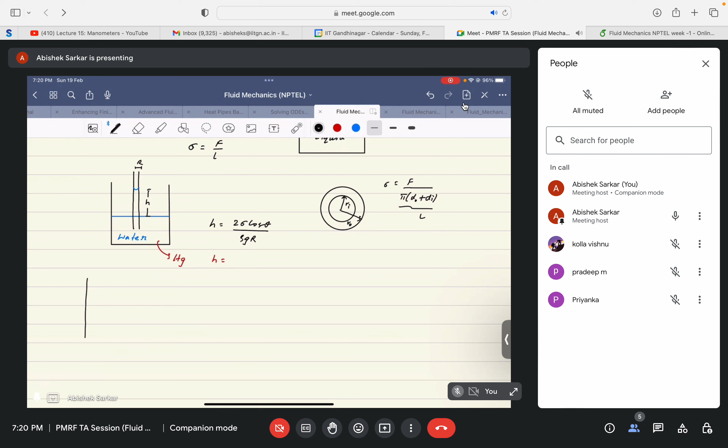The angle of contact will vary. Yeah, thank you, angle of contact will vary. So instead, let me zoom out this picture. In the case of water, the meniscus formed is of some shape like this. So the angle of contact in this case, if we extend it, becomes this, theta. This is for water.

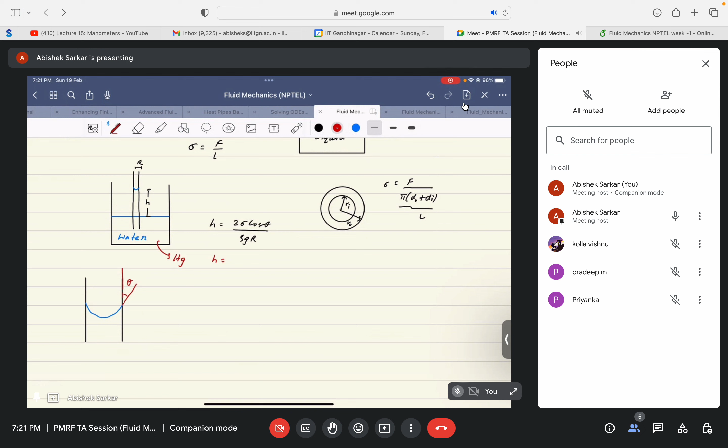But in the case of mercury, the meniscus is oppositely shaped - it is concave for water, so it will have a convex shaped meniscus. Since mercury is hydrophobic, it tends to have a different shaped meniscus, just opposite to what water has. So it will have a meniscus of this shape, and the angle of contact in this case becomes this, I suppose.

So because of the choice of our angle, is there anything, Vishnu, you want to add? 130. Yeah, 134, is it? Thank you, absolutely correct. So 135, which is not the exact value, but yeah, you're absolutely correct.

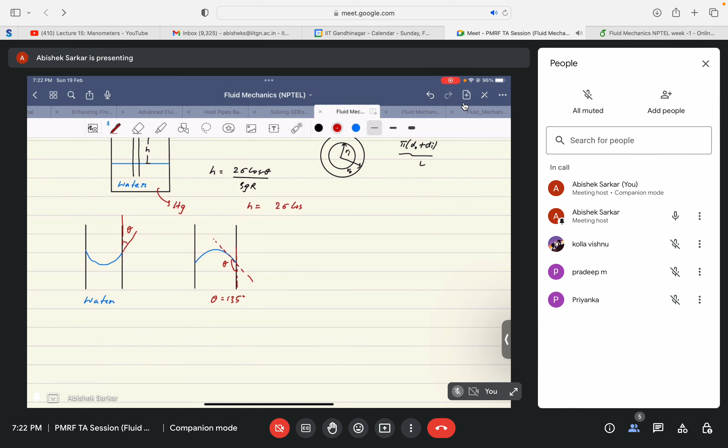But in general, if the angle is not explicitly mentioned in the problem, the expression for capillary rise in the case of hydrophobic liquids is given by 2 sigma cos(180 minus theta) divided by rho times g times R, where for mercury it's rho Hg minus rho water into g, and R is the radius of the tube. Okay, so I guess these concepts are clear.

If you just recall from your lectures, could anyone tell me what are the parameters upon which this capillary rise depends?

Based on atmospheric pressure and the density of the liquid. Okay, one by one. Pressure, then density of the liquid. Okay, yeah, then there are many. Geometry of capillary tube. Yeah, absolutely. Geometry basically means the radius. Material, okay, yes.

So what is the parameter that the material of the tube decides, specifically? Contact angle. Okay, I guess the contact angle is because of the liquid used, not the material, but something else. Material basically signifies the surface roughness.

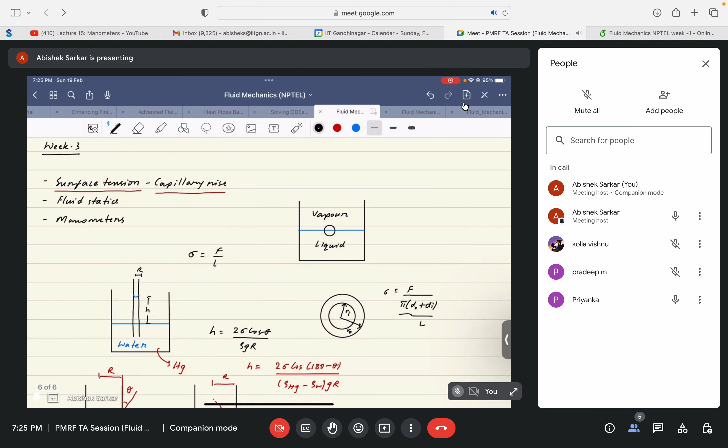So now we go to- Hello? Yes, yes, please. Sir, regarding surface roughness. Is it friction, like are you talking about friction? Yeah, absolutely, yes. Okay sir. Because the surface, however smooth the surface we may create, it will always have some small protrusions emerging out of its surface.

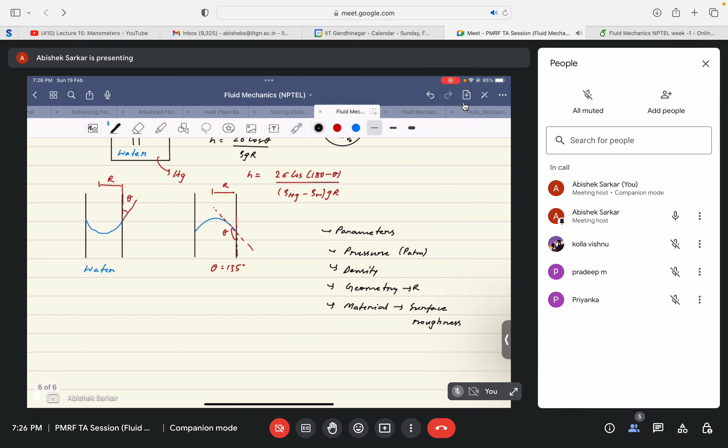No matter what we do, we cannot achieve 100% smoothness in the surface of the glass. So because of the manufacturing, I could say, difference in the type of different types of glass or any material that we've used, it will have different friction factor depending on the size of protrusions coming out of the surface. So then it may also have effect on the capillary rise, but we have not taken into consideration in this expression. But in general, it also depends on that. So just for your knowledge, I mentioned it here, and I guess Professor Chakraborty also mentioned it in the class, just for recapitulation. Okay sir, okay, thank you.

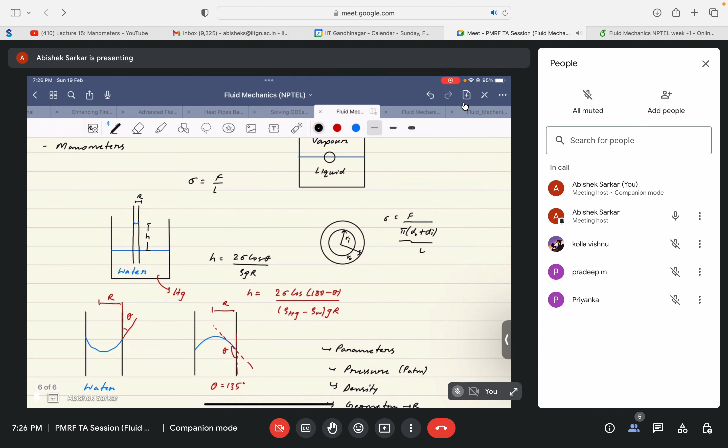I guess that's all from surface tension and capillary rise. So let me just recapitulate a bit from fluid statics.

So what do you mean by fluid statics? Why do we study it? How is it important from a fluid mechanics perspective? Could anyone please explain fluid statics? What does the name itself suggest? Vishnu, Pradeep, Priyanka, anyone please. There is no external force.

Okay, one by one please. Yes Pradeep, go on. Fluid will be at rest. Yeah, absolutely correct. The fluid will be at rest. Thank you. So Priyanka, I guess Pradeep also answered it correctly that fluid is at rest. So what...

Changes, or what makes this kind of problem different from, say, the fluid in motion? So what happens when the fluid is at rest? If you have attended the previous sessions, one of the three TAs might have discussed what happens when the fluid is at rest. Professor Chakraborty has also discussed it in his lecture.

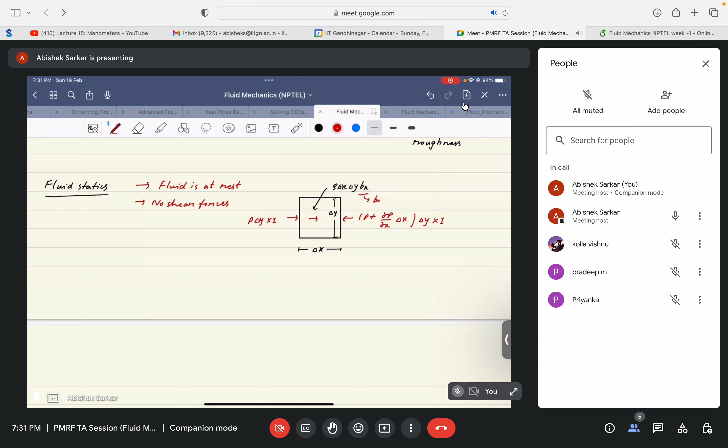I'm just doing this for the forces along the x direction. You can approximate the same for the y and z directions - that will be completely correct, but for simplicity I am just doing along the x direction. Here bx is the body force along x direction. Following the steps discussed in class, you find out all forces acting along the x direction, and you get the final expression as minus dp by dx plus rho bx is equal to rho ax.

Don't mind that I'm still keeping the rho ax, assuming the fluid is in motion and disregarding the presence of shear forces, but keeping in mind the condition of fluid statics, this term will go to zero, and you're only remaining with del p by del x is equal to rho bx.

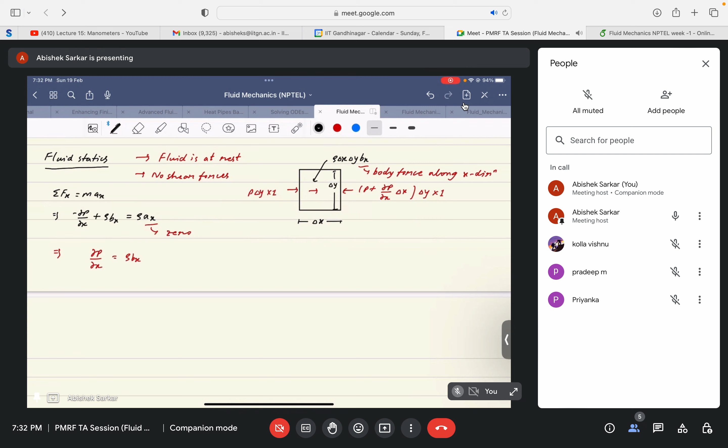Okay, for fluid statics, but I wanted to focus upon this expression - say equation 1, then this is 2, because this equation has a special name that you will eventually encounter when you go deep within this course. So this is a very special name. So anybody by chance knows what this equation is called?

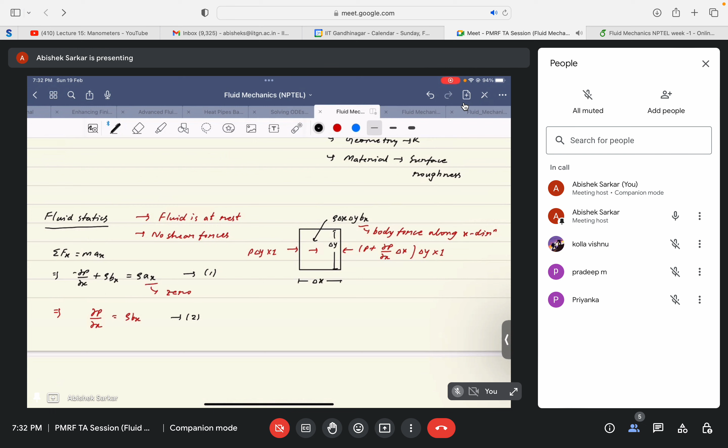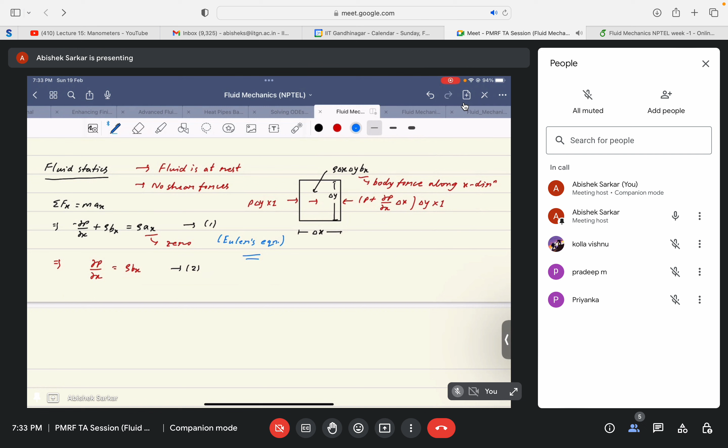Euler's equation. Yeah, thank you Priyanka, you're absolutely correct. This is known as the Euler's equation. It is same as the Navier-Stokes equation, but just removing the shear force terms. So Navier-Stokes equation without considering the viscosity of the fluid gives the Euler's equation. You don't need to emphasize upon it much for now, because you will eventually read it in the fluid dynamics part, but for your understanding of the course in a better way, I'm just trying to give you the essence of what you're going to eventually learn.

So this is known as the Euler's equation. So we are left with equation 2, which basically gives us pressure gradient along x direction is equal to the density of fluid into the body force along the x direction. Similarly if we consider other directions, we will obtain del p by del y is equal to rho b y, and del p by del z is equal to rho bz. So this is all for Cartesian coordinate system.

I will just again go a bit fast because these things have already been discussed in the class, but still, because these things are necessary for solving the problems that we'll do in today's class, you need to have some basic recapitulation.

I guess Professor Chakraborty has mentioned what this symbol means. So can you please tell what this symbol basically means? Free surface. Yeah, thank you, absolutely correct. This is known as a free surface.

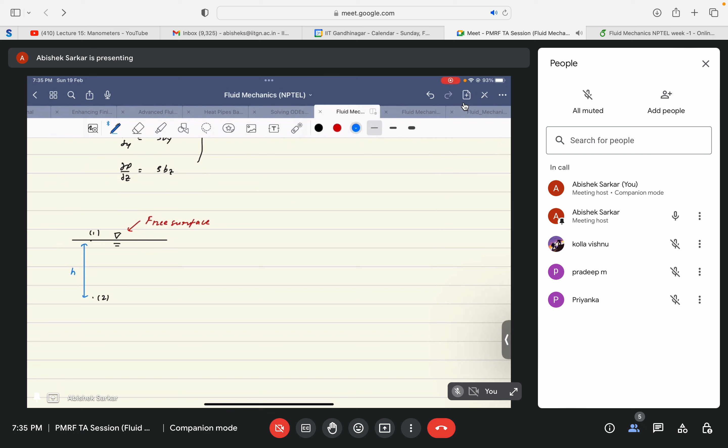So say we consider a case where we want to find the pressure at a point - say this is point 1 and this is point 2, and we want to find the pressure at point 2, where it is at a depth h from the free surface. Say I want to mold my coordinates such that this is along x, this is y, and outside of the screen, perpendicular to it, is the z direction. So the fluid is completely at rest. Say I'm considering a stationary container, the fluid is kept there, and I want to find the pressure at point 2.

So what will be the body force along x direction? Can you please tell, given this is the coordinate system, and this is the scenario, fluid at rest. So what will be the body force along the x direction? Considering only gravitational force, it will be zero along x and z.

Thank you, you're absolutely correct. So as I already mentioned, it is a stationary container and the fluid is at rest, so the only body force that will act in this case is the gravitational force.

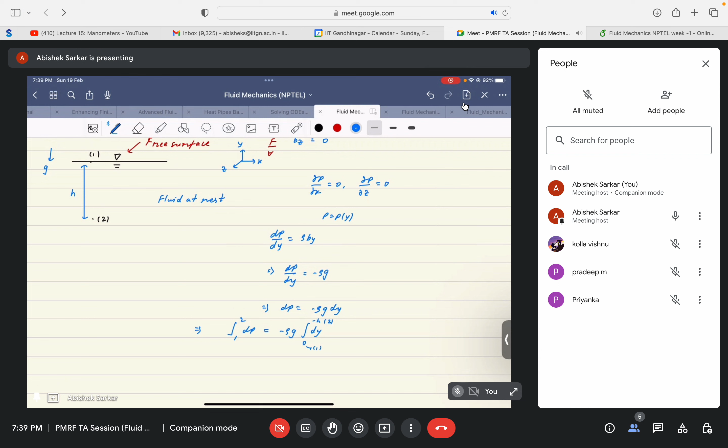Why have I chosen minus h instead of plus h? Because we are going below the surface, vertically downwards, right? And we have assigned our coordinates in this fashion: vertically upwards is the positive y direction. So given this sign convention,

we will obtain P2 minus P1 is equal to rho g h. Then pressure at point 2 will be given by P1 plus rho g h. And if we consider that pressure at point 1 is equal to the atmospheric pressure,

then pressure at point 2 would basically be equal to P atm plus rho g h. So this is a very important expression just to find the pressure at a point, given that the fluid is at rest. So I guess this is also clear.

So only thing that remains is the principle of manometry for today's class. The principle of manometry, or the basic principle upon which manometers function, is basically upon this fluid statics, the hydrostatic law. So it is just the application of this expression, choosing the proper point of reference.

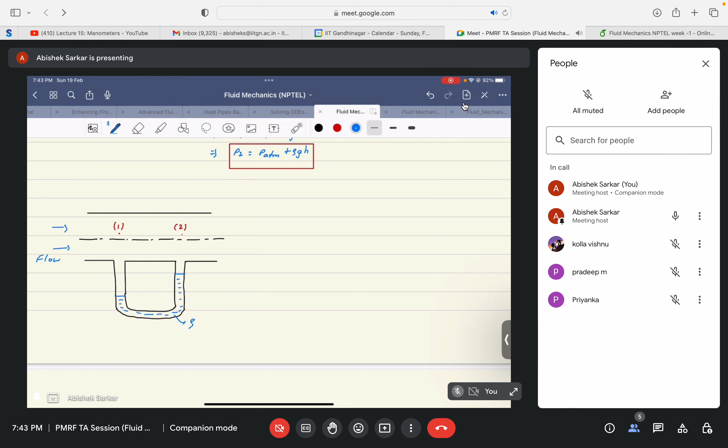Can you please explain? Could you please repeat the question, sir? Now I mentioned that there is a flow through this pipe, and only then do we have a pressure difference between points 1 and 2. Why is it not possible that without flow there should also be a pressure difference between point 1 and 2? Why does there have to be a flow for there to be a pressure difference? So would you please tell, given there was no flow, would there be a pressure difference between point 1 and 2? No, it will be in equilibrium.

If there's no flow, that will be equilibrium. Yeah, thank you. So both of you are absolutely correct.

So if there's no flow, there's no pressure difference between point 1 and 2 because they are at the same level. I will clarify it because it may create confusion, but yes, they are at the same height. So if there is no flow, there is no pressure difference between point 1 and 2. But given that there is a flow in this case, there will be pressure difference because of the loss in the pressure head due to friction in the pipe. You will eventually learn in the later part of the course what is pressure head, what is pressure drop in a pipe, how it is measured.

There are various expressions using it. Then you will eventually learn the Bernoulli's equation, how it is derived. So in that case, you will know how pressure difference arises due to the flow between 2 points in a pipe at the same height. So it is the flow that creates the pressure difference along 2 points at the same height.

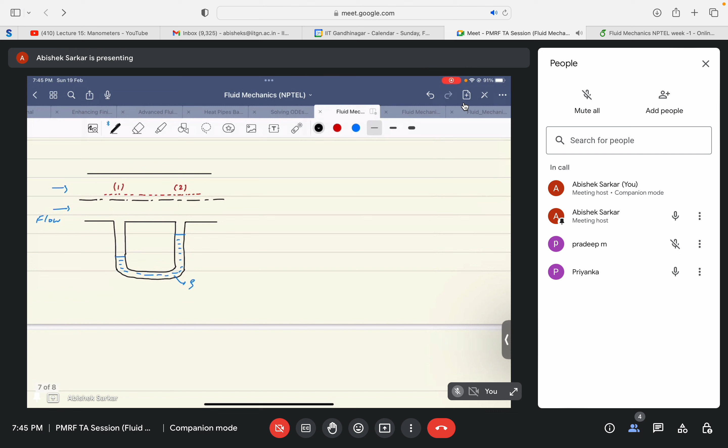Okay, so yeah. Hello? Yes sir? Regarding the flow which you mentioned, for the flow to happen between 2 points, the point of consideration is the energy difference, no sir, as per Bernoulli's equation?

Yeah, you are absolutely correct. Yes, so say there can be pressure difference, but energy can be same. Can't it be like that? I mean, since energy is same, there can't be flow, but pressure difference will be there. Can it happen like that?

Okay, you are saying the energy is same, but there is pressure difference. Yes, can it happen like that? So there is no flow because energy is same. Let me think about it. Okay, I will just try to write the equation and let's discuss together.

Yes sir, yes. But the very principle upon which the Bernoulli's equation is derived is the conservation of energy. So energy is conserved between these 2 points. It is by that principle only we have derived the Bernoulli's equation. So what you have mentioned is that there is no pressure drop between the 2 points.

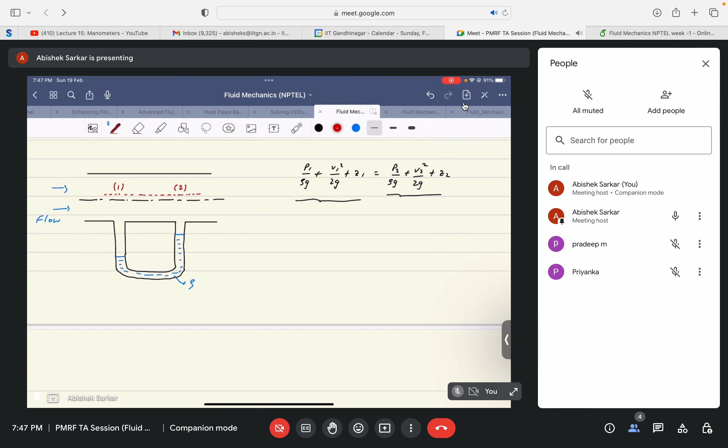Okay, so let me assume that there is no pressure drop between these 2 points, right? So the kinetic energy at both the points are equal. Okay, so yeah, this is your case, right? This is what you're mentioning, right?

No sir, I mentioned that pressure difference is there. Can it be possible, such a scenario? Energy is same, pressure difference is there. Yeah, energy has to be same between the 2 points, right? There is no difference. The energy has to be conserved, right? It is the basis by which we have derived the Bernoulli's equation, right?

No sir, but for flow to happen, there should be a difference in energy, right? No, that's not the case. Have you seen it mentioned like that in the lectures, or are you asking out of curiosity? In general, actually, we need...

Hello, yes Pradeep. We need pressure difference for flow to happen, right? It's not about energy, right? Yes, that only I'm speaking. The fluid should... yeah, okay, yeah, that only. So that only I'm trying to explain it to Priyanka.

See, we derive... listen carefully. We derive Bernoulli's equation with the principle that the energy between the 2 points are equal. That's why there's an equal sign, right? We have equated the energy between 2 points, and this is basically the flow energy. Say En, this is the kinetic energy, this is the potential energy. So equating these energies at 2 different points, to actuate the flow these parameters balance each other in a different way.

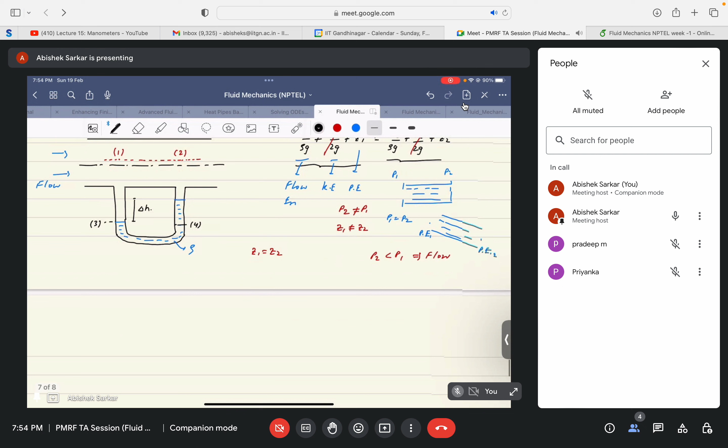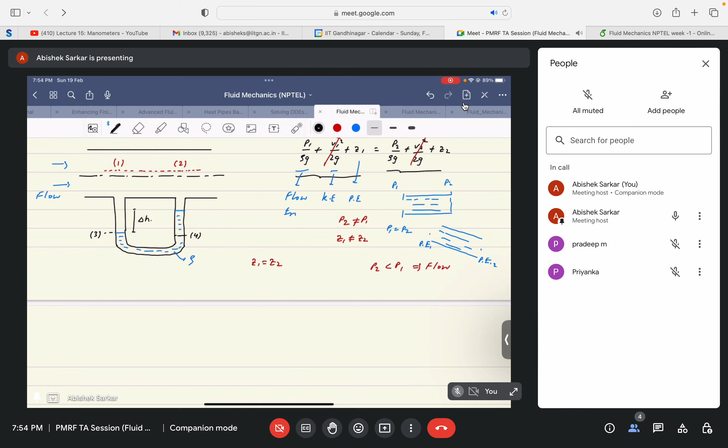To obtain the pressure difference between two points, what we basically do is balance the pressure with respect to a particular datum. A datum is just a point of reference. In this case, we choose our datum to be of this form, say the datum passes through point 3 and 4. It is upon this only we will measure our pressures, we will equate our pressures.

So basically this means that pressure at point 3, because the fluid flow is stationary at this region, pressure at point 3 would be equal to pressure at point 4. So am I correct? I guess yes, sir, it is correct.

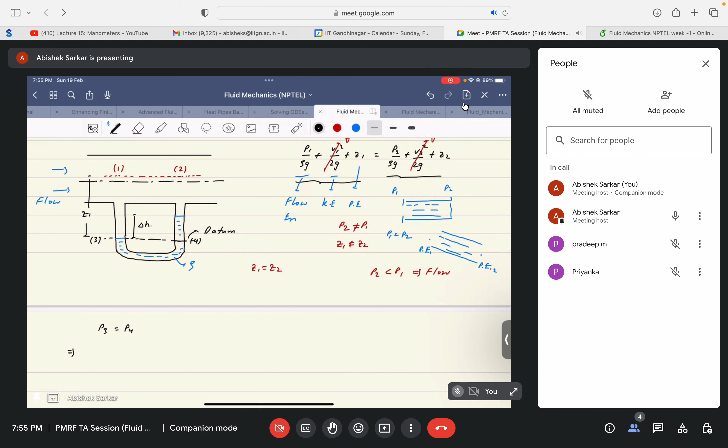Thank you. So this would be, say it is Z1, the level of the liquid from point 1, and from point 2 to the surface of the liquid is, say, Z2. So we just do the pressure balance. So here it is point 1, so P1 plus, so say this is some fluid, say this is water, for ease of convenience. So what will be the pressure due to the water at point 3?

Because of this height of water, what will be the pressure at point 3? It will be rho water G into Z1. Again for point 2 this is a bit tricky. Up to Z2 the height would be equal to rho water G Z2, but here, say this is point 5, so point 5 to point 4 the liquid changes. So we need to take into consideration the difference in liquid along the height, it is not the same. Throughout Z1 the liquid was the same, it was water. That's why we have directly written it as rho W G Z1.

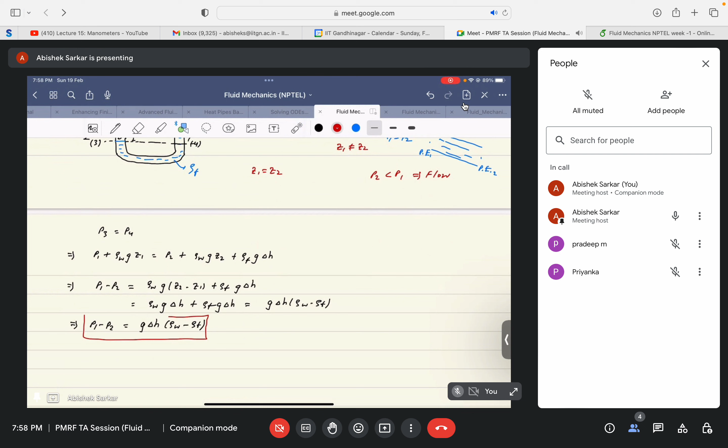So, okay, so this is all about the principle of manometry.

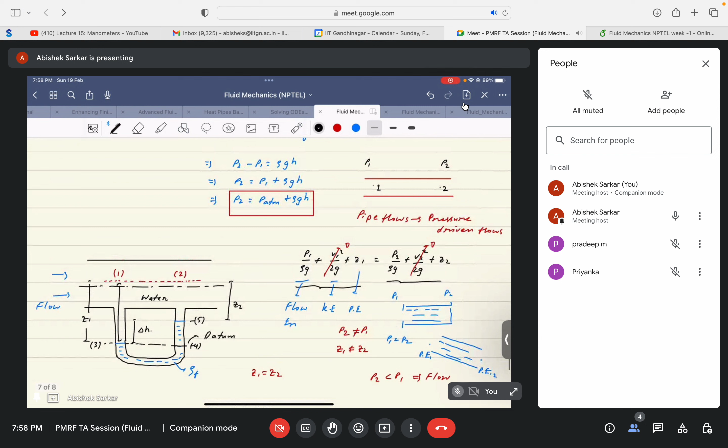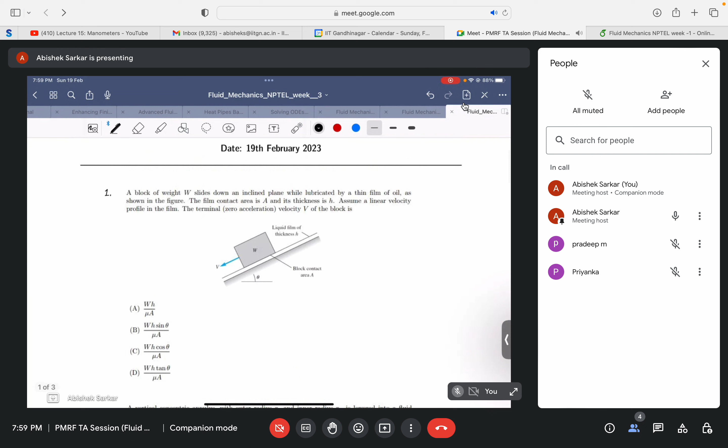So I guess I have covered, recapitulated all the topics discussed for week 3, so I'll directly go to the problems for this week. Both of you are there, so please help me out solving these problems. I guess you are very clear and better than me in solving this, so please help me out.

So I'll read the first question. A block of weight W slides down an inclined plane while lubricated by a thin film of oil as shown in the figure. Yeah, this is the oil. The film contact area is A, and its thickness is h. So this is basically equal to h.

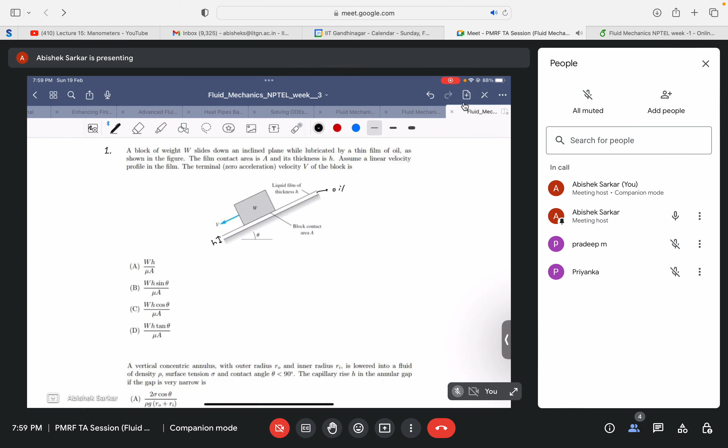Assume a linear velocity profile in the film. The terminal or zero acceleration velocity V of the block is given by, so these are the options. Please go ahead and try, and once you get the answer, don't just tell me the option, also tell me how you approached solving it, and we will try to solve it together. Just look at the options and tell me, solve it and tell me what would be the right answer.

Hello sir. Yeah, so using balance of forces. Option B. Okay, this is one answer. So Pradeep, you feel the same way? Yes.

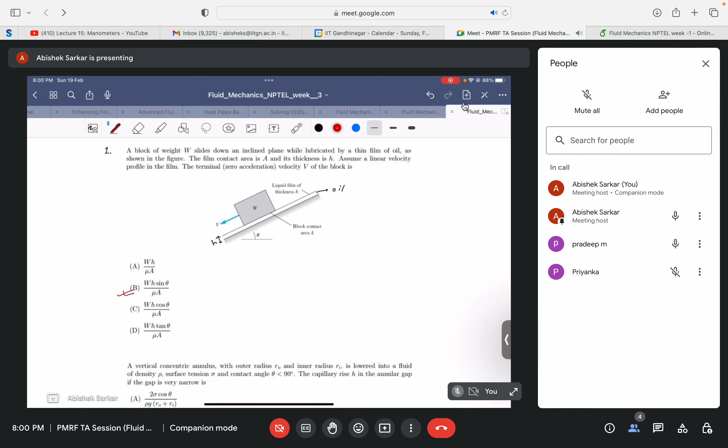Okay, then I think I would not have to solve this entirely, but just to tell the steps for reference. If I'm wrong in any way, just tell me. So weight will act vertically downwards, so we have different components of weight. We dissociate the weight into different components. Say, so this would be W cos theta. This would be W sin theta, right?

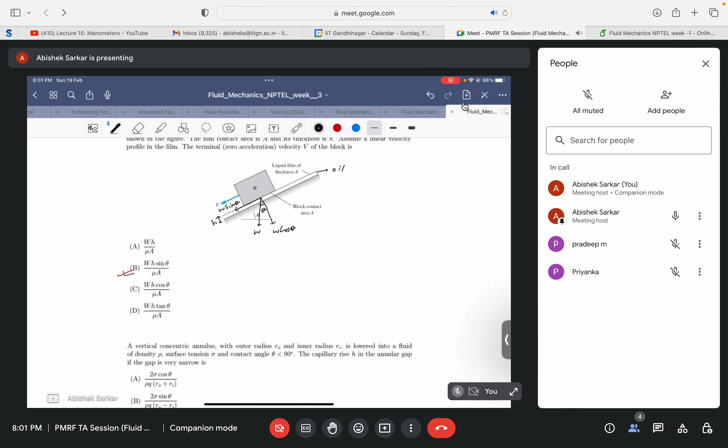So the motion of this weight will be resisted by the shear force, right, that acts against the direction of motion of this block. So that will be given by tau into A, right? I guess the area is also mentioned A. So it basically will be equal to W sin theta is equal to tau into A.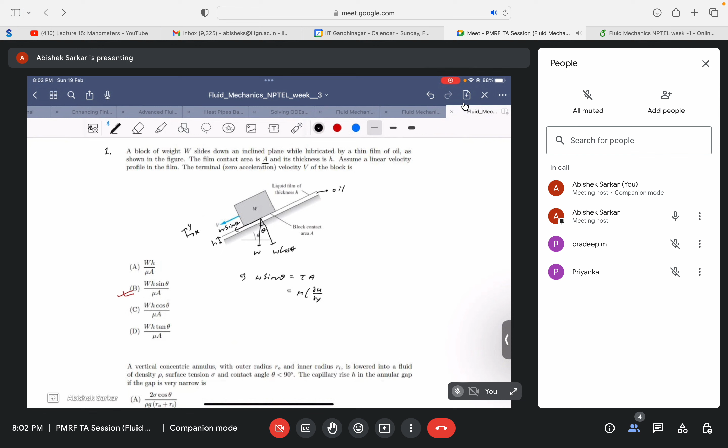And tau is given by mu del u by del y, given we have chosen our coordinate system like this. You have to mention the coordinate system. If you don't mention it, that's fine, but it's good practice to mention your coordinate system once you try to solve the problem. It shows how clear you are regarding your concepts, so it's very good practice.

So what is del u by del y? V by h. Yeah, they've asked us to choose a linear velocity profile, and if you attended the previous week's session, I explicitly told that even if they have not mentioned a linear velocity profile, if the question says the film thickness is very small, we can assume a linear velocity profile. But here they have explicitly mentioned it, so it's very simple for us.

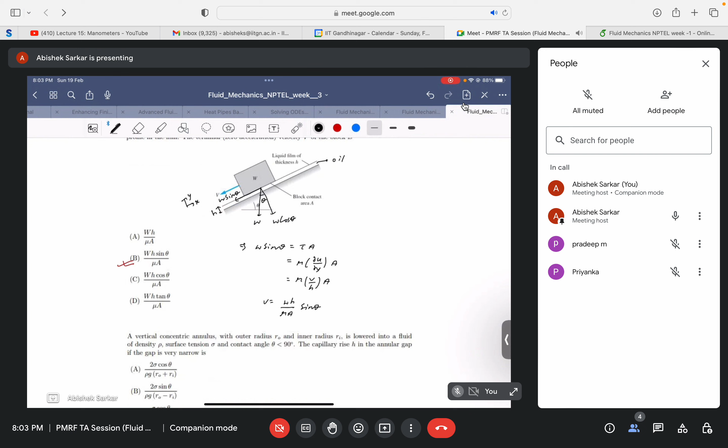So it's mu v by h a. Okay, just play with the terms, so we obtain the velocity as... sine theta. So I guess you're right. Let's go into the next question. Thank you for helping me solve the problem.

Let's go to question number 2. A vertical concentric annulus. Do both of you know what annulus means? Two concentric cylinder tube. Yeah, thank you, you're absolutely right. So annulus is basically the gap between the two cylinders. So concentric annulus with outer radius RO and inner radius RI is lowered into a fluid of density rho, surface tension sigma, and contact angle theta, which is less than 90 degrees.

So the capillary rise in the annular gap, if the gap is very narrow, is given by, so these are the options. It's very simple, again you apply the principle of capillary rise. Just go to the fundamentals of how the expression of capillary rise was obtained, play with the terms a bit and you will easily get the expression. So please both of you try a bit. I have told you how to approach it. Just tell me what is the answer, and I'll wait for a few moments. Please try it and tell me the answer.

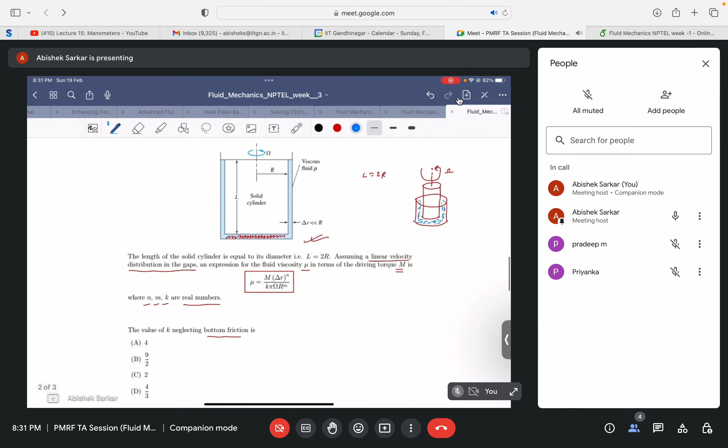So yeah, I guess you understood the problem. Is that clear, or do I need to repeat it again? Is that clear, Pradeep and Priyanka? Yes, sir. Yeah, thank you.

So it's a very involving problem, I must say. It's a very interesting and involving problem, and there are many sub questions to this problem. You need to derive the expression itself from the start. If you refer to the notes, follow the similar steps, find an expression for M, for mu with respect to the applied torque and other flow and geometric parameters, and then we will find out what are the values of these indices and the constant K. So just find an expression by deriving the governing equations as done by Professor Chakraborty.

Go to your notes and tell me what would be the value of K for the first question, neglecting the friction at the bottom surface. Please try, and once you obtain the solution you need to help me out to solve the problem also, because I don't know how to approach it. So please go ahead, take your time, it's an involving question.

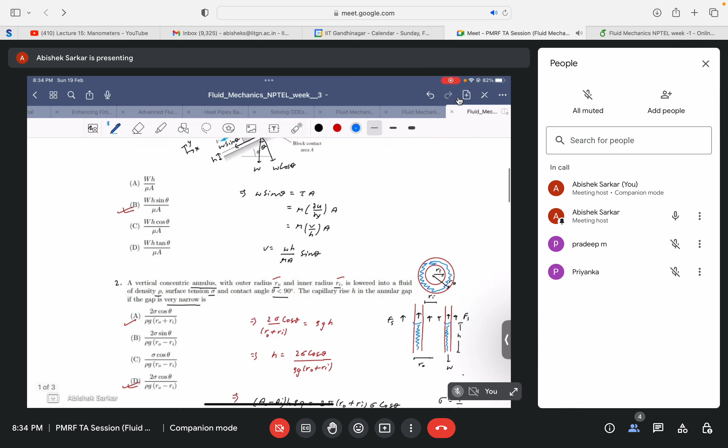Okay, sorry to interrupt both of you. I just want to clarify one more concept before going forward. So Priyanka, could you please pay attention for a while, both of you actually? Yes, sir. Yeah.

So previously you have asked a question regarding your energy head, right? Yes, sir. Yeah. So I just went through my own notes and tried to recapitulate. So you were right, okay. I was also right in some sense that this Bernoulli equation has been, what to say, derived keeping in mind the energy conservation.

But this expression is incomplete in a practical sense, in a way that there is always a head loss in the flow when flow flows from point 1 to point 2. Head loss occurs because of friction within the pipe, right? No pipe is smooth enough to have zero friction, and that basically occurs because of the viscosity of the fluid, right? If you recall.

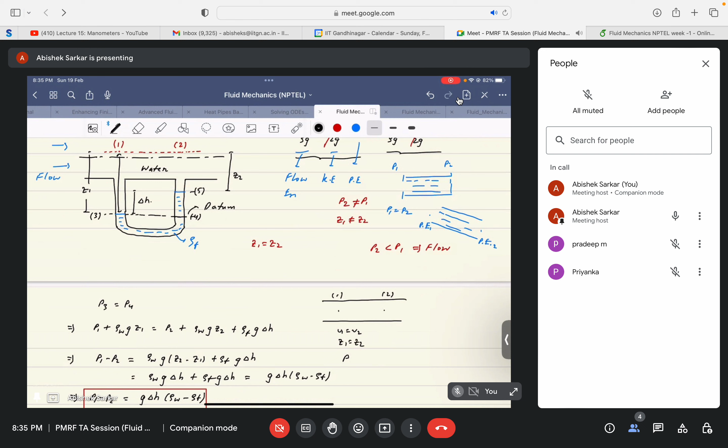Yes, sir. Yeah, so there has to be a head loss because of the viscous nature of the fluid, right? So given that, even in a scenario, say in a straight horizontally placed pipe, between point 1 and point 2, v1 will be equal to v2. Why? Because the dimensions are same, right? Again, yes, z1 equal to z2, and you are saying that there is a flow because of pressure difference, say p1 is greater than p2. But to satisfy this equation, there has to be a term on the right hand side to balance this pressure difference, right? The difference in the pressure head. So that is being balanced by this loss term, okay, the head loss term in the equation.

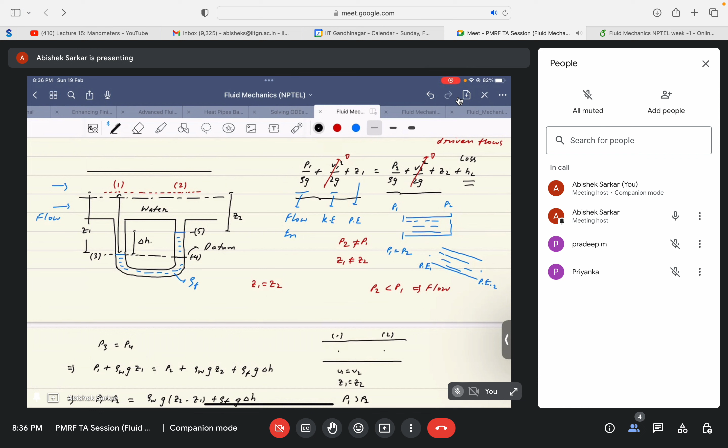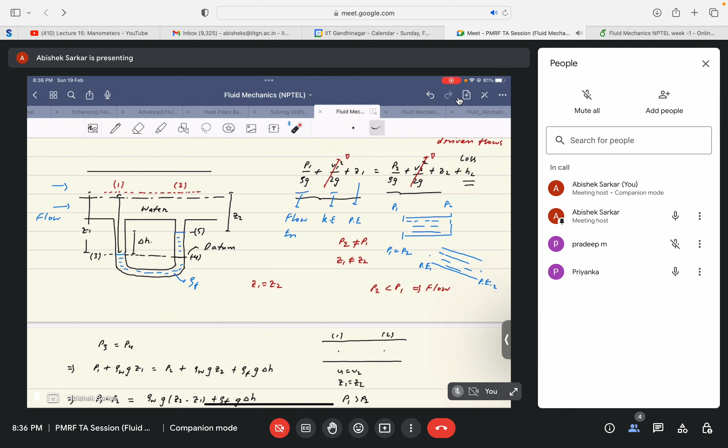So is it clear now? The energy is conserved, but the difference in the pressures is being balanced by a head loss term, this term. Okay, sir, okay, I guess it's clear now. So yeah, please proceed with the given problem. Thank you again for asking such doubts. It's very important for me and as well as the students, more importantly me, to make my concepts clearer.

So thank you, and please go ahead with this problem.

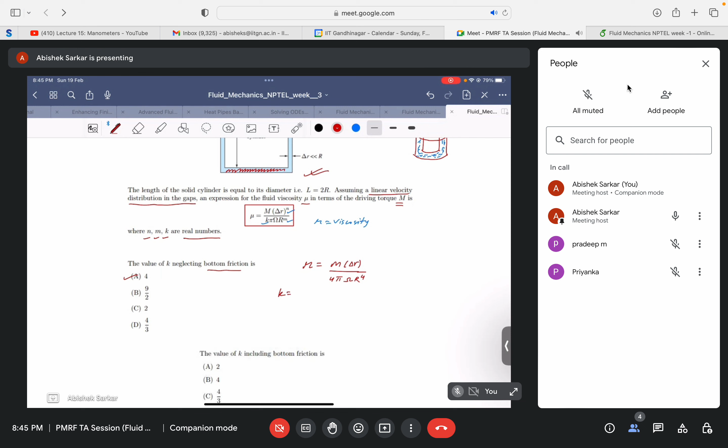So let's wait. Pradeep, have you obtained the same expression? I guess he's also doing it now, so that's fine, still doing it. Yeah, you're correct. So comparing these expressions, we find the value of k to be equal to 4. Okay, very nice, thank you.

So question number 5, I guess, where we need to find the value of k including the bottom friction. Now we cannot neglect the bottom friction, we need to include it. Keeping that in mind, have you done it, or do you need more time? 9 by 2. Let me check. Okay, so could you please tell how you have done it? Just tell me the steps, I don't need the full expression, just the steps.

For the bottom case, I did integration, sir. You have integration in the sense, please elaborate a bit more, like what have you assumed? Let me draw it. That will be good, let me share what I was trying to do. Pradeep, you want to say something? No. Okay, that's fine, feel free to speak up if you have any doubt or are stuck somewhere.

This is the fluid. So now there is friction in the bottom part also. Say omega. So how did you evaluate the friction in the bottom part? I assumed a circular cross section, if viewed from the top. Let's draw it nicely. Then please tell me how you assumed and did the integration, which elemental surface you have taken. Please tell everybody, so that will be good.

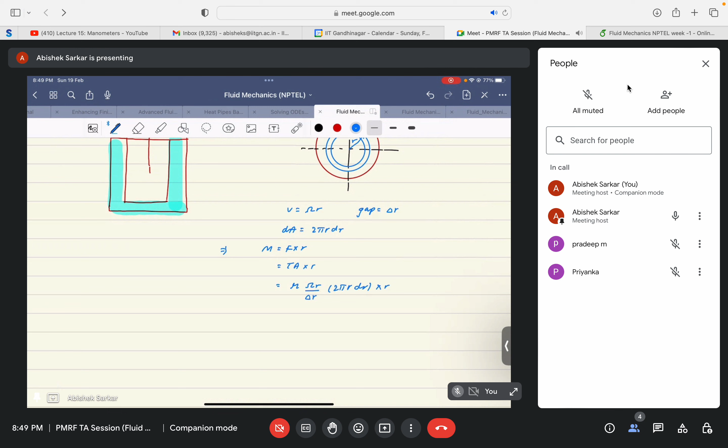Right, and then how will you calculate the moment? For the torque, torque is nothing but force into radius. Force is given by stress into area. And stress we get from the viscosity, mu into V by delta R, because it is a linear profile. And then again there is an area 2 pi r dr, and then again there is a radius, right? So I guess this is an elemental moment instead of the complete moment, and this is not the complete area but the elemental area, so you basically integrate these expressions.

So what are the constants? Mu, omega, delta r, 2 pi are constants. We integrate r cube dr, right?

Yeah, then I guess if we integrate it, we will obtain an expression. What is the final expression that you obtained? T is equal to, M is equal to pi mu omega r power 4, capital R power 4, by 2 delta R.

And since you're trying to find the complete torque, you need to take into consideration the friction at both the lateral surface area and the bottom surface. So what have you done? I added the two, sir. Okay, so net torque is equal to m1 plus m2. Say this is m2, and initially you obtained this m1. So you add both of them.

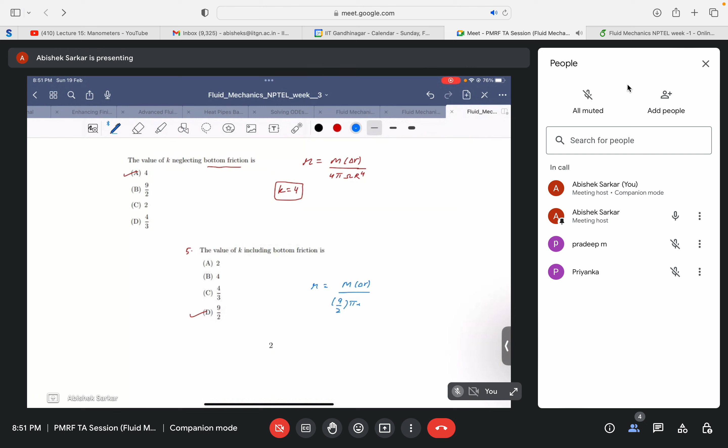So this is the net torque if we consider the bottom surface also. So if we isolate mu, we can write it as mu equal to m delta r, 9 by 2 pi omega r to the power 4. I guess I'm right.

So if we compare it to the expression, mu equal to m delta r to the power n, k pi omega r to the power m. So if you compare both expressions, then k is equal to 9 by 2. Pradeep, is that clear?

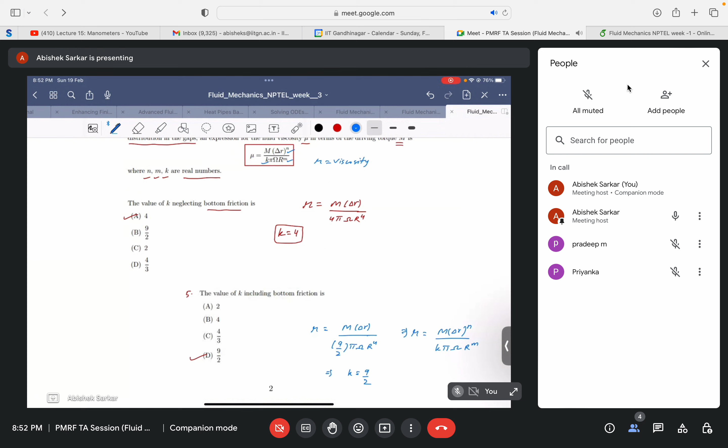Yes, sir. Okay, let's look into the next question. What is the value of n? It's very simple now, I guess. Compare the expressions. 1. Yeah, absolutely correct. And what is the value of m? M is 4. Thank you.

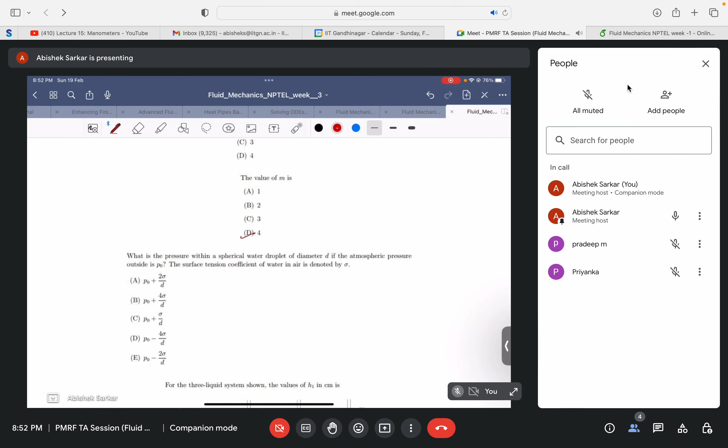So yeah, this was a very involving question. I guess you had to derive it from the start, and if you have followed Professor Chakraborty's lectures, you would easily derive it. But it's very important.

So yeah, the next question. It's a very trivial question, but let's see. What is the pressure within a spherical water droplet of diameter d if the atmospheric pressure outside is P0? The surface tension coefficient of water in air is denoted by sigma. It's a very trivial question, but still you have to think a little bit and recall the expression for the surface tension force for a spherical droplet. So what is the expression? Recall the expressions and just tell me the correct option.

Pradeep, Priyanka, yeah please. Sir, option B. B. Okay, B, the second one, yeah this one. So Pradeep, do you feel the same way? No, I'm checking that. Okay, sure, please take your time.

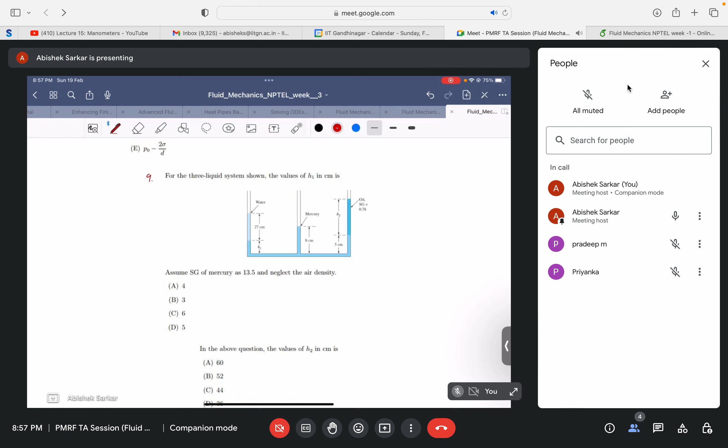Okay, so the final question for today's session. This is basically an application of the manometry principle. Let me zoom in a bit... Yeah, it's clear now. It's a very simple question, but you need to apply all the basic steps: choose the correct datum, and then find the respective heights. Please go ahead, every information is given in the diagram in the question itself.

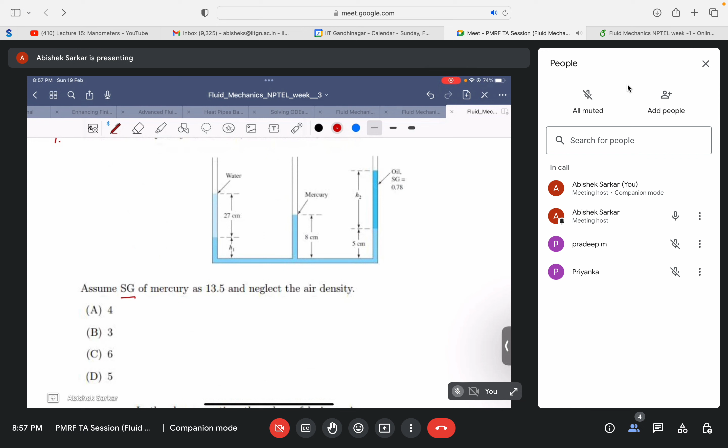The specific gravity of Mercury is 13.5. Neglect the air density, so everything is given. You need to find H1 and H2, subsequently H2 for the next part. It's very simple, just 2 or 3 lines of equations. Please go ahead.

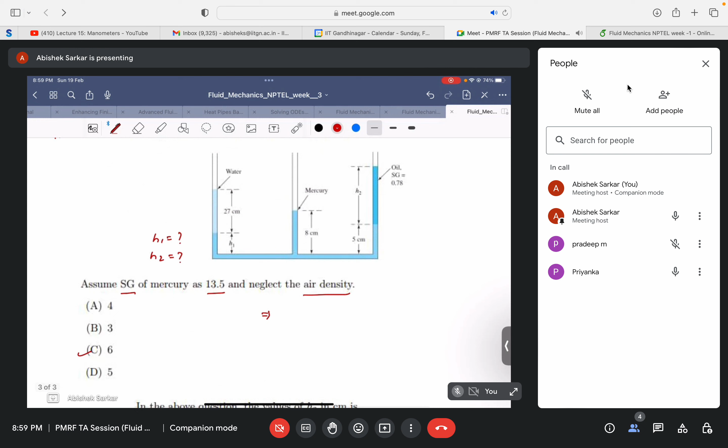Okay, let me also try to solve it accordingly, and you can help me out. I will just write the expressions, then you may tell me what you have chosen as the centimeter value, what you have done. H1 is 6 centimeter. Yes sir, okay, and H2? You can evaluate. Pradeep, did you also get 6?

Yeah, I couldn't get the answer. Have you also got 6, Pradeep? H1 equal to 6.

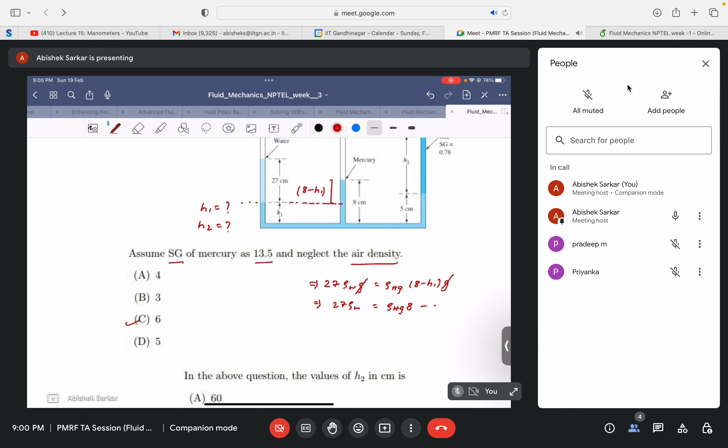So if we choose the datum to be here, then we get this height as 8 minus H1. Then we basically do the pressure balance above this datum line, so it will equal 27. This is the height. Rho water into G would be equal to rho Hg times 8 minus H1, into G -- let me not write G again, then you may get confused. So you cancel out the acceleration due to gravity, then 27 rho W would be equal to rho Hg into 8, minus rho Hg into H1.

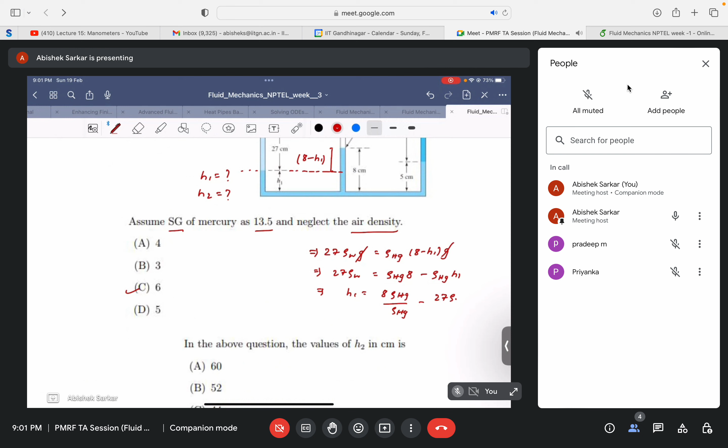Then we just divide, so H1 would be equal to... oh no, I'm sorry, just reverse it: H1 equals 8 rho Hg by rho Hg, minus 27 rho W by rho Hg. I just took this term to the LHS and that to the RHS. So then we get...

H1 is equal to... Priyanka can go ahead with the next question, H2. So this is basically 8 minus 27, and since rho Hg by rho water will be equal to 13.5, it becomes 8 minus 2, because 13.5 into 2 is 27. This is given by 6 centimeter.

So this is simple, you can apply the similar principle on the other side also. Choose the lower one as the datum. Priyanka, did you get the answer for the next part? 52 centimeter? Yeah, absolutely correct. Following the similar steps, you get the answer to be 52 centimeters.

I guess time's up for today. Pradeep, did you obtain the answers? Pradeep? Yeah, hello, please, did you obtain the similar answers? First one I got it. As for the second one, you take it for both densities, right? Just compare with mercury and the oil, okay.

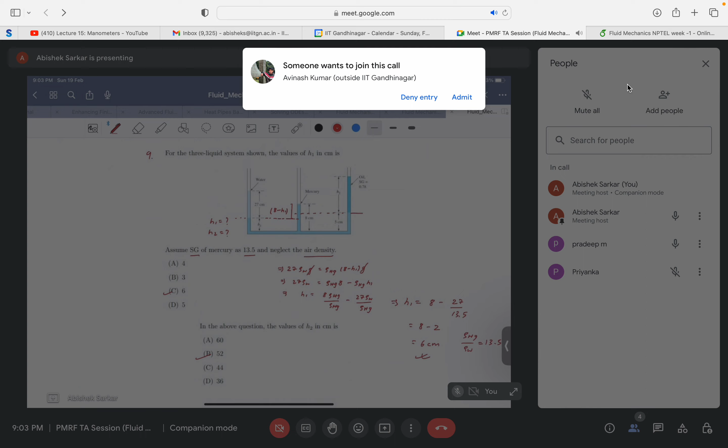Choose the datum as I mentioned, it makes the problem simpler. You don't need to consider water then -- I guess there's no water. You just need to compare the two heights. So I guess that's very simple now.

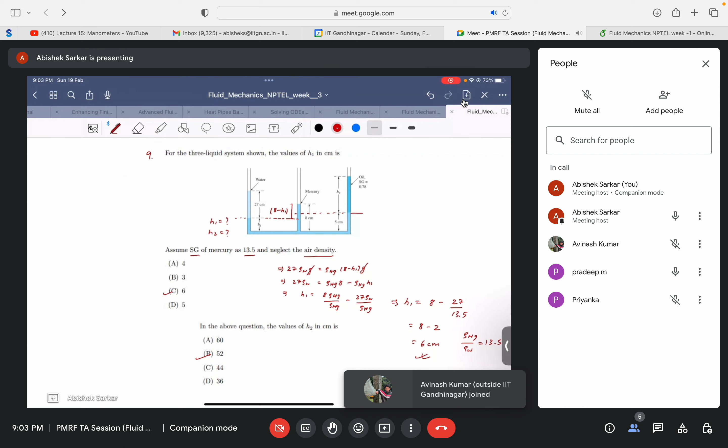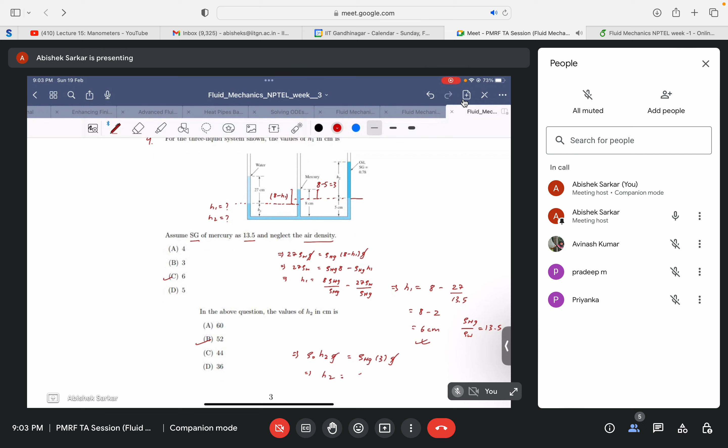Okay, I will just go do it along with you, it will be very easy. Above this datum, if you go, it basically becomes rho oil into H2 into G, and this height would be 8 minus 5 equal to 3. So it will be equal to rho Hg times 3 into G. G you can cancel out, so H2 would basically be equal to rho Hg by rho oil into 3.

So if you do the calculation, just compare the specific gravities: 13.5 by 0.78 into 3. If we do the calculation, it comes around 51.92, so you can just take it as 52, what is given in the option.